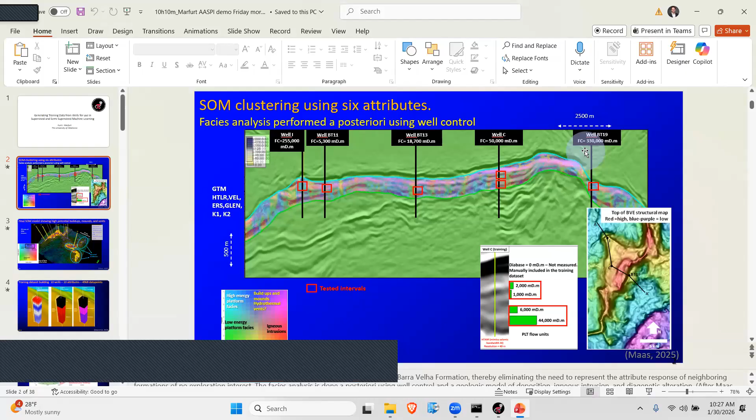David asked me to talk about the rewrite of the Linux interface, which I rewrote. So what happened? What's happened for those of you who go back and forth between Windows and Linux?

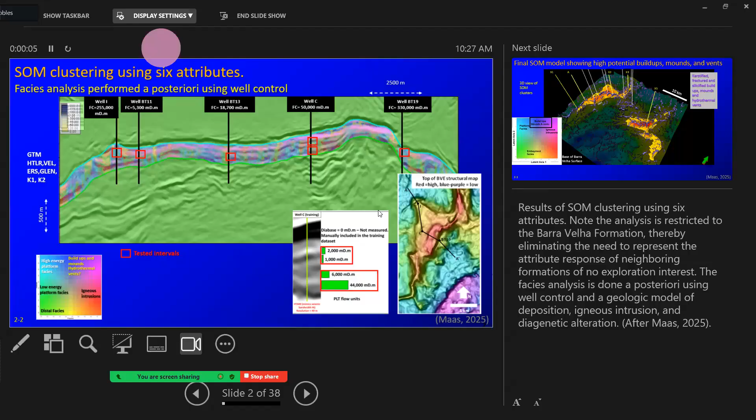You've noticed we had the old Linux environment where we started the user interface, AASPI util. And then about 1.5 years ago, David and Thang Ha rewrote the interface with the VDS in mind and more logical. So in October, November, I said, all right, I'm gonna make all of our Linux interface look as close to the Windows interface as possible.

But then, of course, being me, I said, he should have done this, he should have done that. We argued for two years about what the word machine learning should be. I like the word shallow learning. And he says, no, that's not going to market. Don't use the word shallow learning versus deep learning. He won that argument, okay?

So we call it now attribute-driven machine learning, or multi-attribute machine learning. So then I rewrote all that, and guess what? After I rewrote that, then he had to rewrite the Windows one. But today they look the same, okay?

So I'll go through what the layout is for that and for the pre-stack utilities too, where we don't have a Windows interface. But let me start with this.

This is real simple. As Nora showed the other day, I had eyeball surgery with the cataracts. You will all have that if you live as long as I have. It's not painful at all, but it's a month or two of stumbling into stuff and having glasses that you need near, and you walk into things. So I'll have difficulty here.

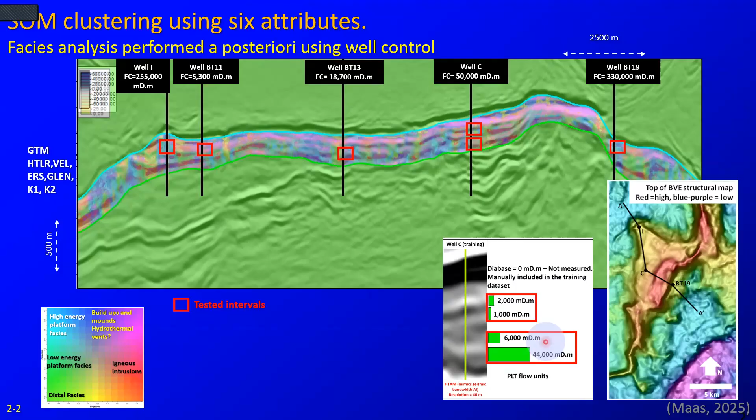So he has high permeability, low permeability. And here is his SOM model showing more geology. So it's a posteriori interpretation. So you do the clustering first. Now choose the attributes, you're prejudicing, etc.

But then with the well control, he can say the purple is karstified, and the red or the pink are igneous, and then the cyan are platform facies, etc. And in there, he's using geomorphology as well, obviously.

Okay, so you got a geologic model, and this is how unsupervised learning works in general. And then he's got appraisal candidates. Here is where all his wells are, and then they haven't done anything, so they're high grading them.

Now, if you remember from last year when he talked about this, the issue they have is they don't have many shear logs, or maybe no shear logs at all. And so they can't do the cool rock physics stuff within a timely basis. So he feels like it's 5 years till they get enough data to do a good quantitative interpretation.

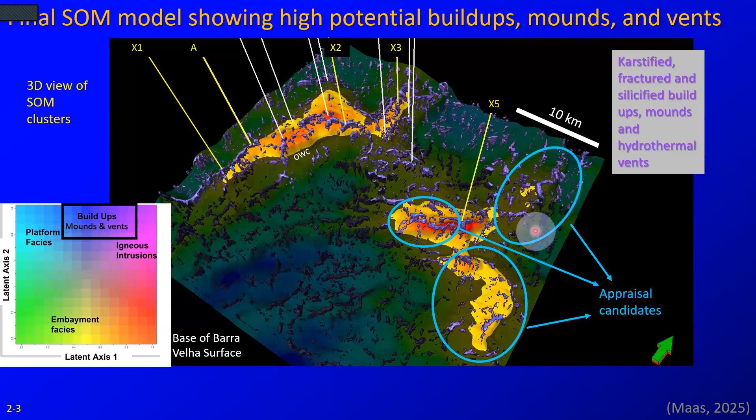So what can you do now while you got your drilling boat out there? Okay, so here is where he went then, and what initiated the work I'll show you here now. The data happened to be pre-stacked depth migrated.

They're good quality data. He took the wells, and then the hard way, using spreadsheets and whatever, he extracted voxels, a 3x3, around vertical wells, okay? And then this became training data.

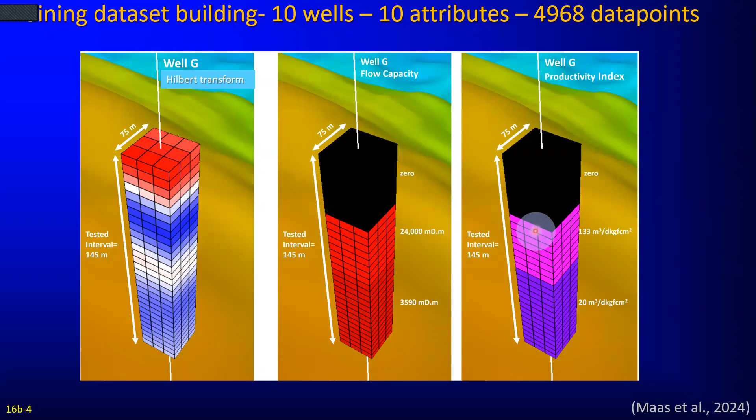So the training data were the different flow units, okay? Really good production, and then mediocre production and no production, okay? So that's the kind of facies that many of you are interested in.

And here is the kind of things the hyper producers, this area, this is what they want to drill first. And then these are good producers, and the geology, from those of you who may have read his papers, they're published papers. Heather has most of them posted on our website. Definitely it's in his dissertation.

It's a lot of hydrothermally altered dolomite. Okay, so hot fluids coming in, karstifying. So it's a pretty cool paper.

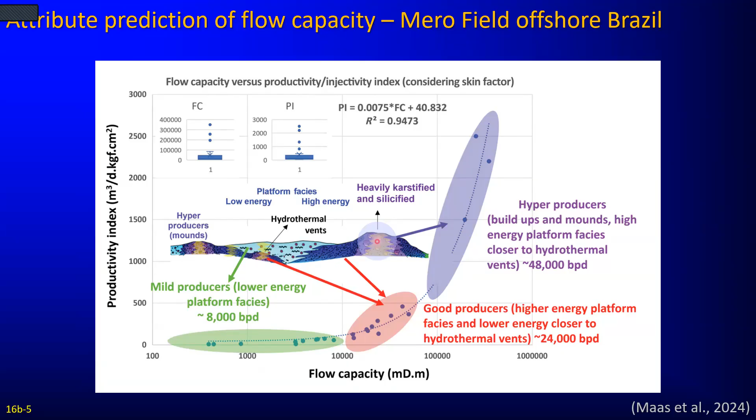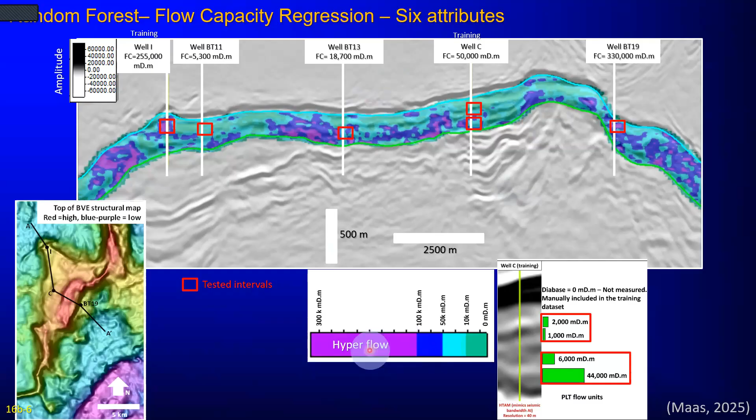So what they want to do is find out the areas with the high flow capacity. And then in this case, he uses a random forest decision tree, the software that David has packaged up, and that training data from the wells to show where is the hyperflow, which are these kind of purple features, okay? So that's kind of where we want to go.

We want everything to be like Marcus did, but not have the patience and the time that Marcus was able to spend doing it, okay? So I thought...

Okay, if you read the newspapers, machine learning is going to get rid of everybody's job. If you look at our software, it's oh my God, where do you even start? It is really complicated. And you've seen little steps yesterday.

The one who went all the way through was Hilmi. Okay, there's Hilmi. Notice I can't see people, all right? So there's Hilmi back there. I think he did a great job of showing the flow. So what I put together is a flow chart, okay?

And this will be in all of our documentation in the not too distant future. So here is where we have started, let's say as of... oh, we've been doing this for 3 years or so, but the software you've used up till now. You start out with a seismic or attribute volume, okay, whatever you like.

And then you define polygons, like, oh, I think this is a mass transport complex. I'm thinking of GA here now. I think this is a mass transport complex, and I think this is salt, diapir, and I think these are conformal sediments, and I think this is maybe a channel.

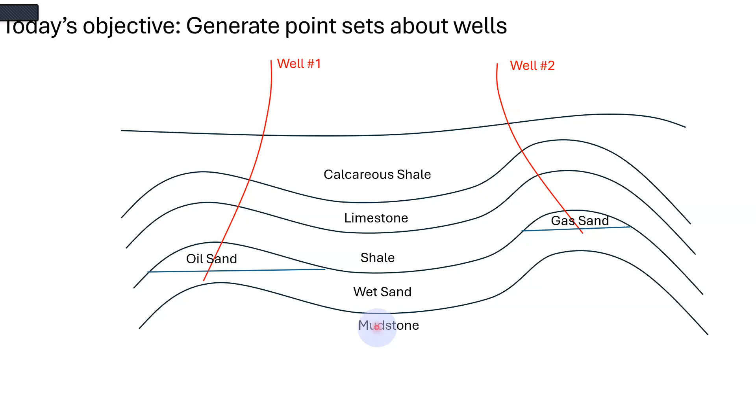So the cases we've done up to date, the wells were vertical. Tao Zhao did one of these down in Tampico, in the Sierra Madre Oriental. Okay, shale, clay, carbonate wash. And then Marcus did one. Here's Marcus's on the left.

And here's basically what this algorithm does. It takes the well logs with measured depth, X, Y, Z, and then we need a facies log. So I've been talking to Georgia and he said, no, all you need is this. So I trust her. I'm going to use the LAS log with facies, where you have measured depth, relative X, Y. I hate that because I have to then have the real X, Y's, another step. And then within that facies, I need the top and the bottom of the facies.

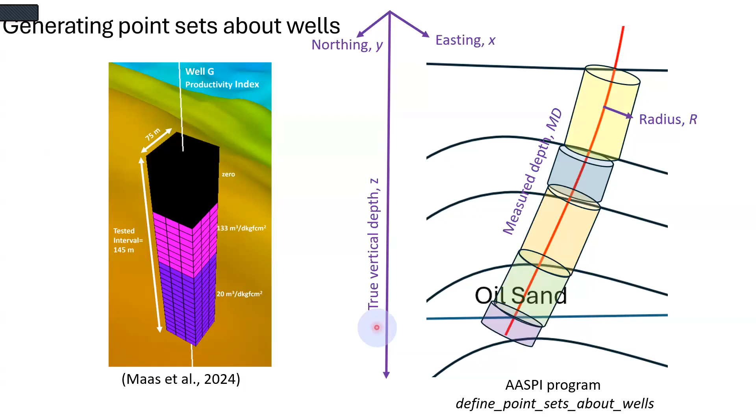You have the dip of the well, and you have the structural dip. So you're going to generate a cylinder that's oriented along that, and that's your points. Okay, so the concept's pretty simple when you draw a picture like this, all right? And so now here's how you're going to generate point sets about the wells. I'm going to go through it and then we'll just do it. It won't take long to do.

So step 0, this is the part that we're not going to help you do. You're going to have time horizons. And if you're in a resource play, you're going to have hundreds, if not thousands, of wells. And if you're in a developed field, you'll have maybe 15, 20 wells. And whatever you have, the engineers want everything in depth. So you're going to convert those horizons to depth, okay?

And the common way to do it with Petrel, for instance, is with geostatistics. So you take your carefully picked horizons, and then you're going to take your time-depth pairs for each horizon. That means you have to tie your wells, you know how to do that. And then you're going to do kriging with external drift. That's the formal name, and Petrel might give it a different name.

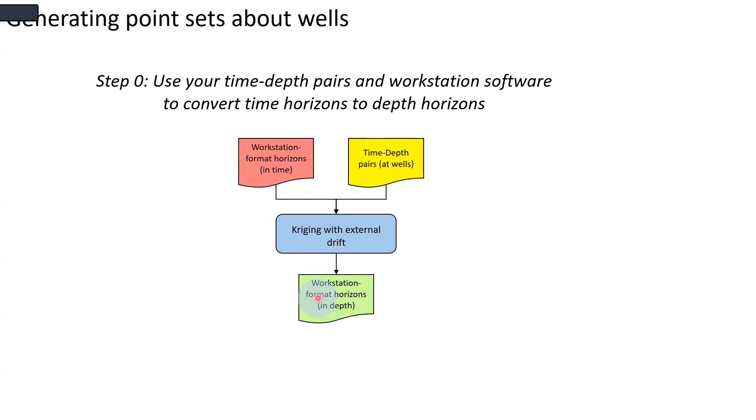Okay, so here's your workstation: horizons in time, your time-depth pairs, kriging with external drift, workstation format, horizons in depth. So I know all the guys in Devon, they do that. They have to do this. This is your product, okay?

Step 1 in our software: these horizons can be in all sorts of different formats, 4 or 5 of them. So you've got to convert your workstation format horizons in time. They're text files, and we need to convert them into AASPI format horizons. We'll do the same for the depth one. Otherwise our codes have to read this option, that option, the other option, and things get out of control quick.

Also, we can display them. Then we need to convert our time domain seismic data to depth. So here's our horizons in time, here's our horizons in depth, our seismic data in time, and we're just going to register the data.

If you have 4 or 5 horizons, you're just going to vertically stretch and squeeze these things to fall in between. It's a real simple concept, but built on the work you do day in and day out, picking half a dozen horizons around your target. It's not going to refocus the data, but it's going to use all that well control you used to generate your depth horizon.

Then step 3, we've got to compute structural dip. We're going to use that depth volume now, push the buttons in AASPI, generate volumetric dip in the depth domain. That's going to give us the guide for these little cylinders.

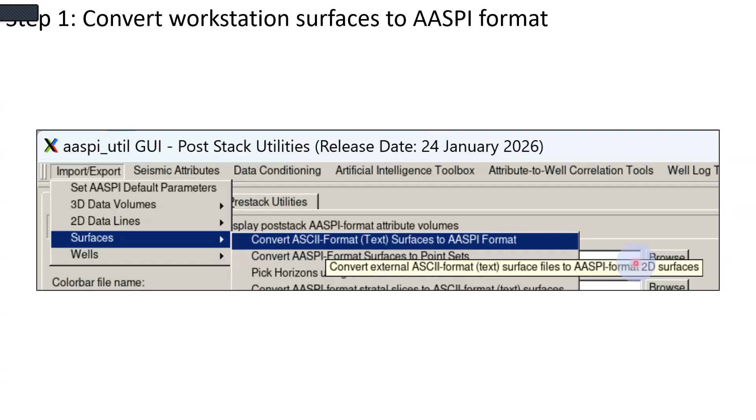Okay, so you're going to pick that up, and in this GUI you're going to have a couple of things. Yeah, I know we did this yesterday because we had this unknown. We're going to pick in the D_MIG Volve—oh, we're in the Volve data set, day 2, Marfurt something. There's a time and a depth. So the time volume is called Volve, and you're going to bring that into the first one.

The default here is EarthVision, we'll skip that for the moment. The input time is going to read it in as seconds because that's what's in the headers, the .h file, and you're not going to be able to change it. That's what it is. But our time data you can change now. Our horizons are going to be in milliseconds.

And our output, we want them to be in seconds. So most everybody will have their seismic data volume in either seconds, kilometers, or kilofeet. That is 98%. Yeah, there's some research guys, now in India, who might have put them in meters or feet. But those don't display well in most workstations. Most of the ones I saw were either milliseconds or feet or meters.

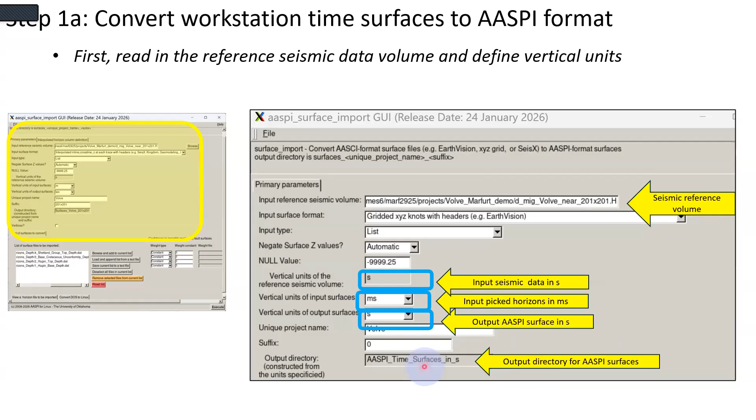Okay, anyhow. The vertical units of the output is going to be in seconds. It's going to generate an output directory called AASPI time surfaces in seconds. Okay, click OK, we'll go through it.

Oh, we don't click OK yet. We've got to worry about the horizons. We're going to go here and click browse and add to the current list. And I guess I should do that.

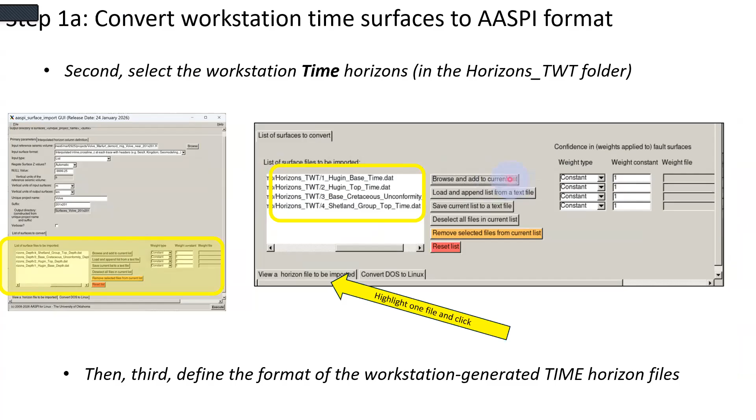So David, if I hit escape, if I minimize this—yeah, here. Okay, so am I in Import, Export? Let me just look at it. Am I in the right spot? No, you're good, yeah. Go up. Go all the way, okay, down. Great, okay, I'm in Import, Export.

I'm going to go to surfaces, and it'll be the top line, ASCII format. Going to browse, bring in my day 2... number 2. I'm in the wrong spot. Day 2—you're in the right spot. This is time depth. Oh, time to depth, thank you.

Okay, so it's got that. And then it's saying, hey, you've got to define your vertical units. It's going to be by default undefined, because you don't know what it is. So I want them to be in seconds. I'm just going to put anything in here, January 30th, whatever.

And then down here, I'm going to browse and add to current list. I'm in this time depth conversion thing, and they're going to be called horizons_TWT. There's four of them, numbered from deepest to shallowest, but let's just go pick them. Okay, so there they are.

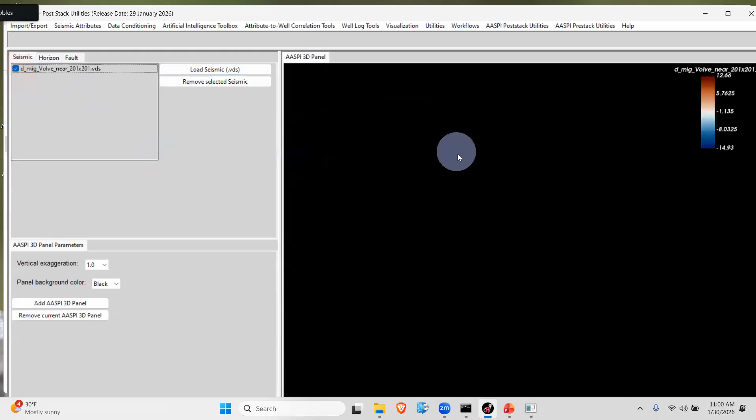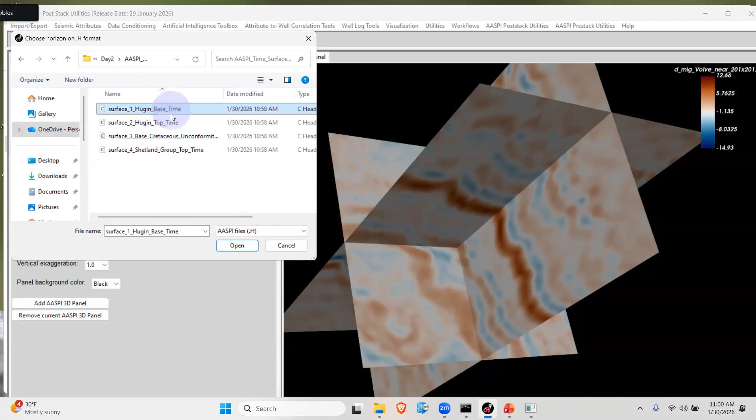And here's my data. Got it upside down. Then I'm gonna have horizons. Gonna load horizons. They're going to be time surfaces in seconds. I got 4 of them. Gonna choose them all. Open. Then I'm gonna display them.

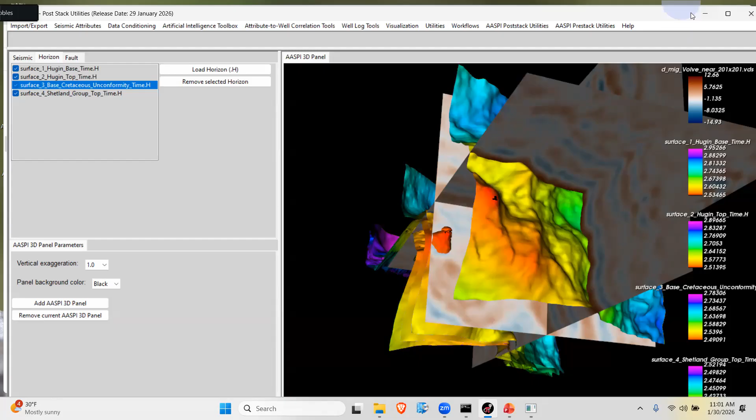Okay, so here we got the surfaces in there, okay? So if you don't like the surface, they were picked by somebody at Statoil. Okay, so you might get something like that, okay? Now, I think they're probably ended up like that because I didn't restart it.

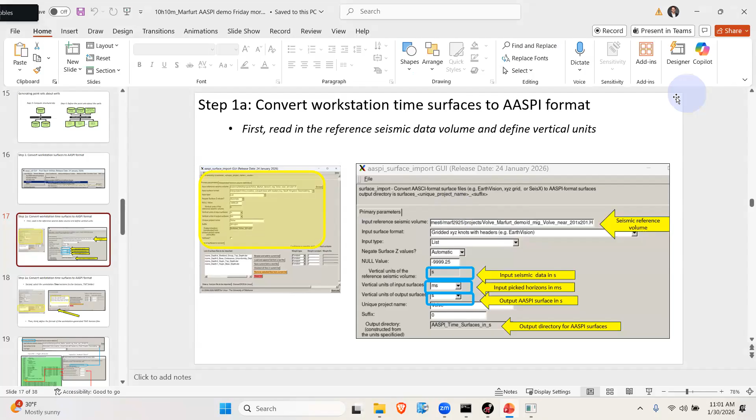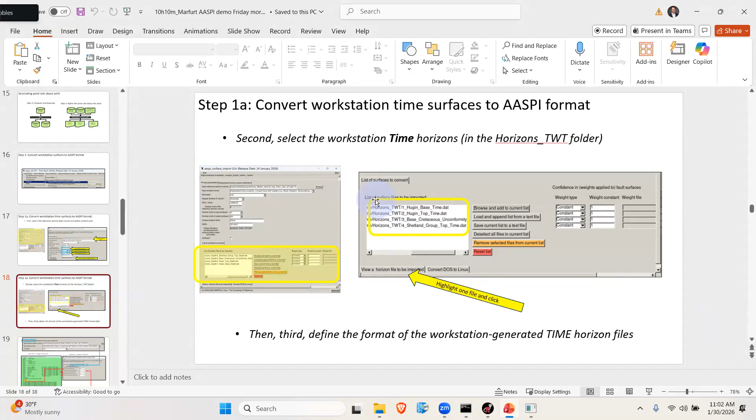And then I highlighted this thing. I picked my 4 horizons. And then I had to worry about the format. So I had to skip the first 58 lines and I went to 5, 1, 2, 5. And it has to be the Kingdom Suite, geomodeling, this is maybe Charisma, one of those.

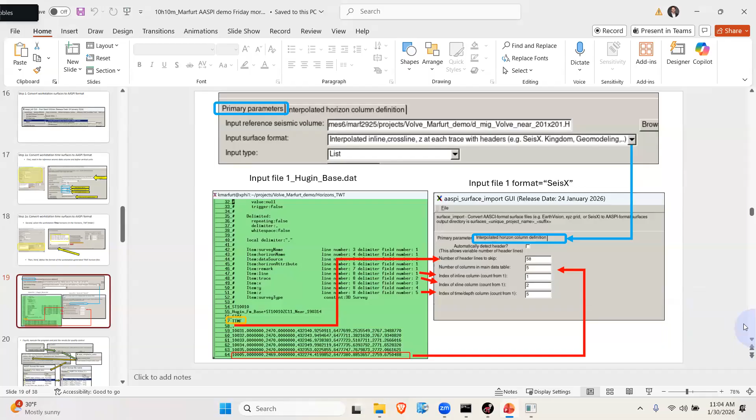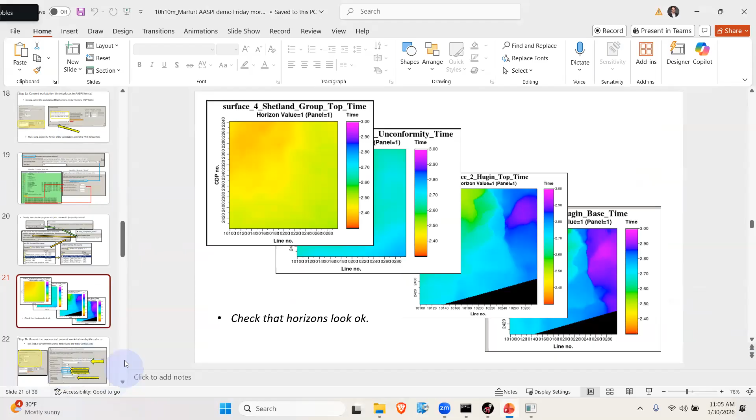And there's really only one difference in depth. We're gonna use the same thing, and then I say, yeah, it's a good idea to quality control your surfaces. So many of you did that already. Okay, then we're going to repeat the process for depth. We're going to use the same seismic volume. And now the difference...

When we bring in our data, are we seeing it? Yeah, we're seeing it. Good.

Our reference seismic data is in seconds because that's what we got. We got pre-stacked time migrated data. Then our input geostat horizons are in meters from Charisma, whatever. And then what we want to output them is in kilometers. So you see, we got three different units here now. Okay, so we're going to do that.

So we're going to put in meters, kilometers, and the input data we can't change. So what it's reading from the input data are the X, Y, inline, crossline. That's what it's reading, the size of the survey. If your horizon is much bigger than this piece of the survey, which it is here, it's going to crop it to be just overlapping the survey.

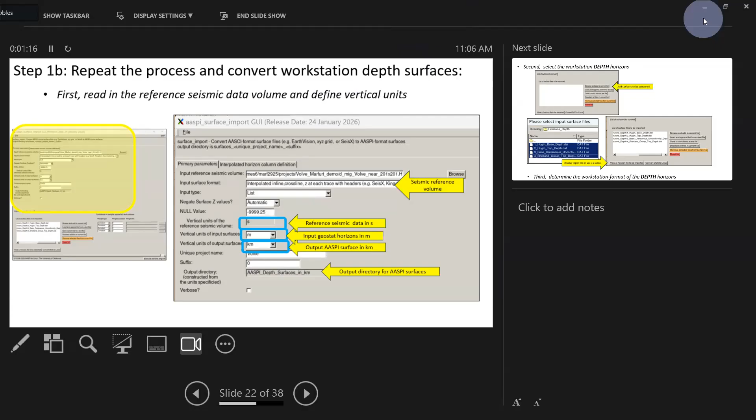Okay. Yeah. Okay. Okay. George, can you help them? We're trying to follow. Okay. So in this, okay, I will then go back here.

I'll minimize this. Okay, I am in surface input. I am going to surface import. I've got the same reference horizon, which is D, MIG, Volve. 101 by 1, or 201 by 201.

Then I've got a Z-null in mapping. Z-null means it's not a point. So a common one is minus 9999.25. That's just a common one, okay? From the people who wrote all, the same people wrote all the mapping software.

Yeah, the ZMap people wrote it all. Yes, they wrote it for everybody. Quit, started another company, rewrote it.

Okay, so the input units of the surface now are going to be in meters because they're the depth data. The output surface I want to be in kilometers. And then I need my output directory to have a similar name, but it's going to be AASPI surfaces, depth surfaces in kilometers. That way you can keep it straight in your head.

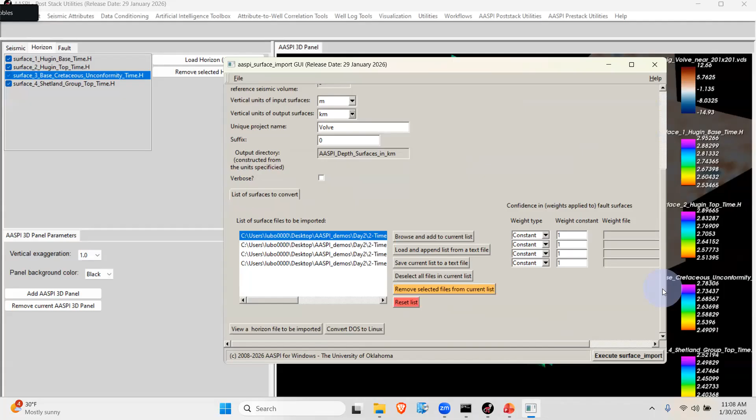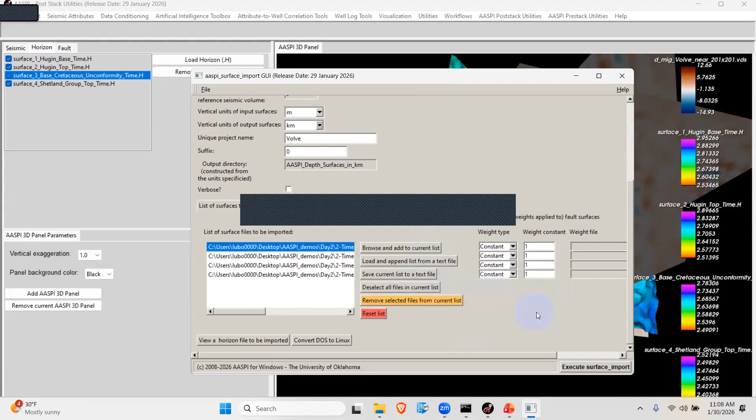All right, now I've got to bring in, I can go back, I can reset the list of horizons. I'm going to go into a directory called up, got to go up, and they're going to be called horizons_depth. And those are the ones, again, that came from Statoil.

Okay, but they were converted to depth using geostatistics or whatever. And I've made the name simple so it's easy to understand which one's high and low, because you guys don't work the North Sea, or most of you don't. So the base is below the top. The base is at the bottom, so I'm numbering like a geologist where we started ancient time and whatnot.

Gotcha, all right. But you know that you might have different styles in different companies. Yeah, okay? Yeah, just like, hey, red is good for low value, shallow, and then velocity analysis, red is hot for high value. Yeah, so, you know. Okay, so I got those.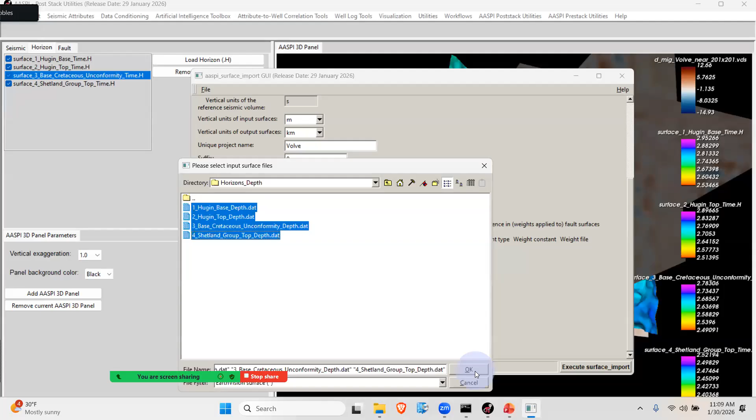Now the format is going to be the SeisX format. Going to be very, very similar, okay? But I need to change it just one thing. For whatever reason, the header data has 59 header locations, okay?

And how do you do that? Well, you look at the simplest thing. I use VI and Linux because I'm a Linux person. But you just bring up your happy editor and you put the number of lines, and you say, okay, that's it. I mean, that's the foolproof way.

Does the automatically detect header not work? Where's David? Try it. No, I tried it and it did not work. No, okay. I didn't write that. I'm just wondering what. Me neither. I didn't write. I was fine. So yeah, I'm scared of it. Okay, I don't know what it's looking for. It's very complicated. No, all right.

So then, that should be good. I'm gonna just execute. Hopefully it works. I'm gonna multiply by 0.001 again. And it says it worked.

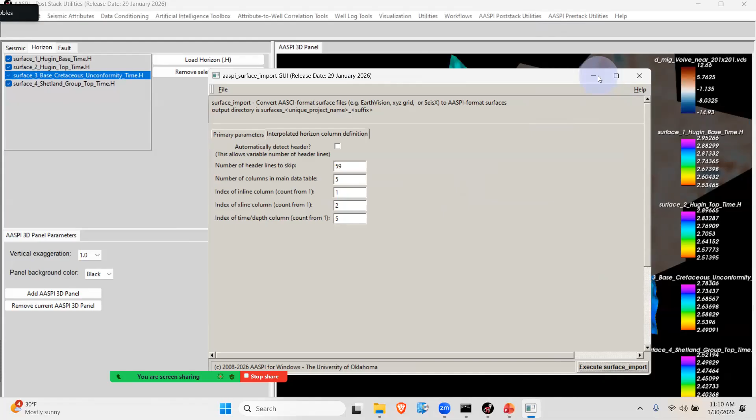Okay, one thing, with the 3D, if you want to find the surfaces in depth, it's not gonna match. They're gonna plot, but it's not gonna match. It's because in the 3D, there is no coordinate system. I mentioned that, then I was gonna skip that part. It's okay, just, it's because they are loading the horizon, so just caution. So the XY is XYZ, but we don't have a coordinate system. So everything is like in number of inline, number of crossline, number of time samples. So definitely the time and the number of samples, because the sampling interval is different, doesn't make match. So I'm gonna put some more control there.

No, it's probably a two-line fix. Here's the issue: we don't have any depth data, so we don't have a depth reference. And we don't know how high, how deep, how shallow to make it until we've brought in all the horizons in depth, which we haven't done yet. So you gotta, it's not a difficult thing.

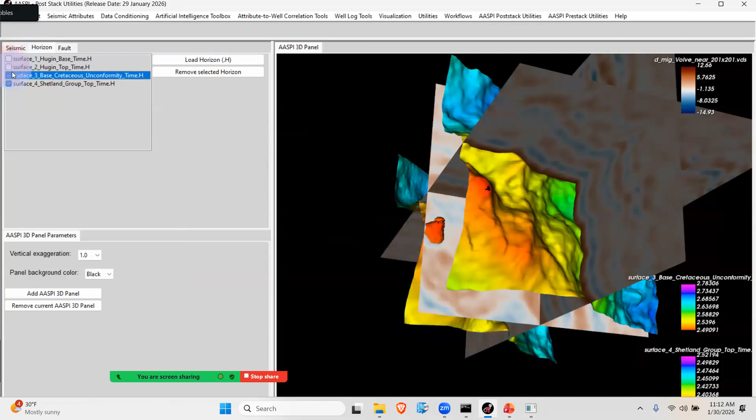No, it's not difficult. One thing I'm gonna put as a toggle is time and depth, like a lot of interpretation packages have. Okay, now David, are you saying I cannot? You can plot it, but it's not gonna match the position. No, it's not. So I'm just gonna take off the seismic as well.

I'm just gonna load those 4 horizons so you can see that they did get loaded. Go to Horizon, load horizons. It's going to be under this directory called AASPI depth surfaces in kilometers. I'm trying to be real explicit as to what they are. I'm gonna pick all 4 of them. It doesn't matter the order right now. Open it, and then I have to put a check mark in front.

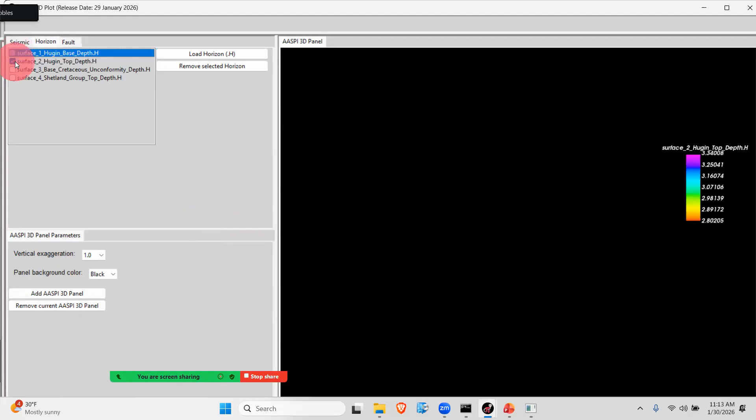And there they are, okay? So those are the depth horizons. They're just horizons, okay? So hopefully we got there. Is everybody kind of there? Yeah, all right. Okay, now the next thing we're going to convert to...

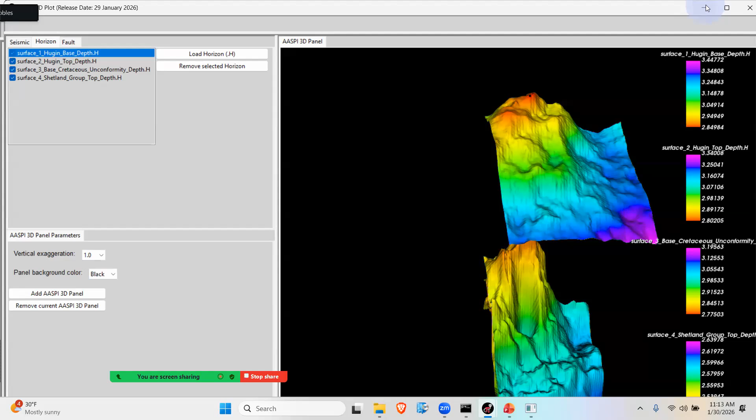We're going to take our depth horizons and our time volume and convert it to depth. So we're going to go under data conditioning on the main menu, and drop down to convert from time to depth. Now, the same program we call from 3 or 4 places, in the pre-stack data we do this AVAZ and stuff like that, but here it's the same program, okay? So you convert from time to depth. Everybody kind of sort of there?

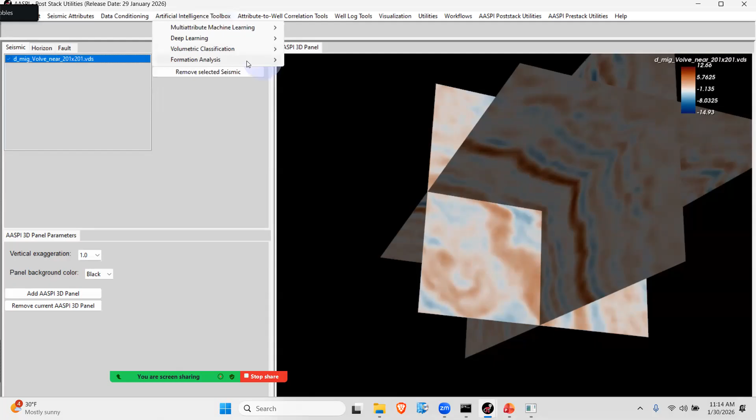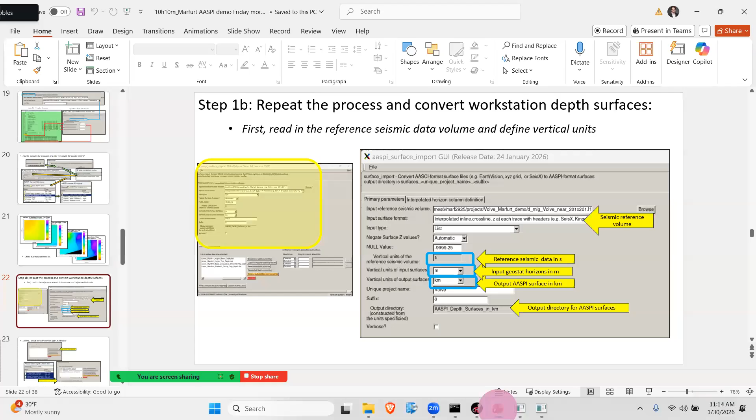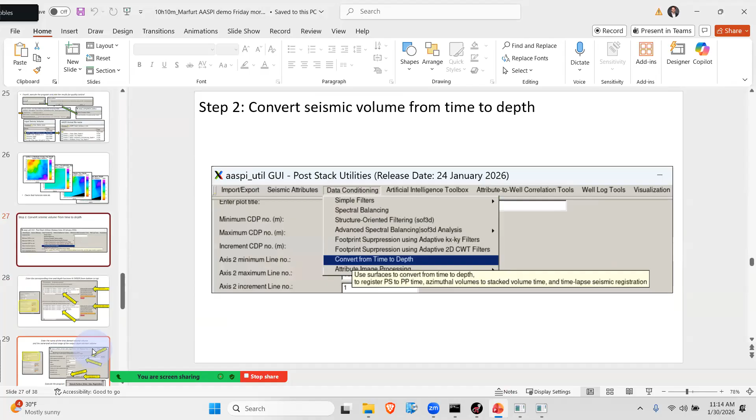Okay, so here is the surface-driven registration GUI, and let me just go over it a bit in the PowerPoint. It's kilometers, right? The output? Yeah, the output's in kilometers.

And the first thing we're gonna do is bring in time and depth horizons. So if you drop down on this GUI, here's where I am on the GUI. Hopefully that GUI came up for you. All right.

Is the GUI showing, Corey? I kind of got behind on everything. But I can't try that. Okay, we're gonna help. It came up. It's under data conditioning. Yeah, okay, all right.

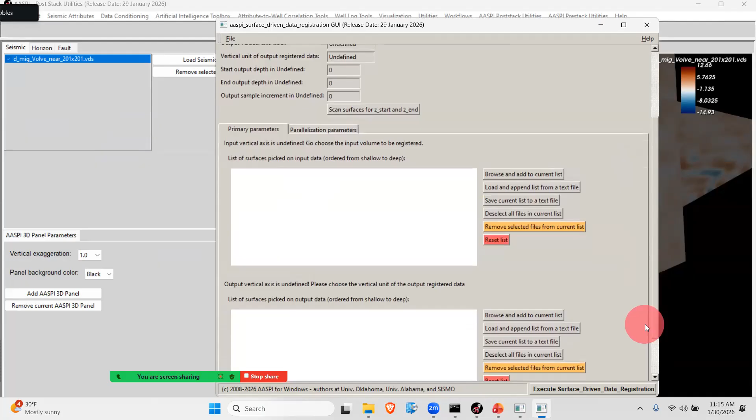So now let's go to the hard part first. In the top it says here... let me go up here. I'm going to bring in my data set, D MIG Volve, and it's under time to depth conversions and ML. Okay, so that's where it is. Give it any suffix you want. So that's my time volume.

I've got to enter my... I'm wondering why it's doing this wrong. Hang on, I don't know why that's... okay, let's go. Oh, here it is. Here it says the input vertical axis is in seconds, so I go to time surfaces in seconds. Now this is where it gets a little tricky.

I'm going to click this guy on the right, it puts a name, and I'm going to sort them so that number 1 is on the bottom and number 4 is on the top. Because these guys have to have the same number of horizons and in the same order, since they map 1 to 1. Can you order them with the minimum of each horizon, the maximum of each horizon? You can do it automatically.

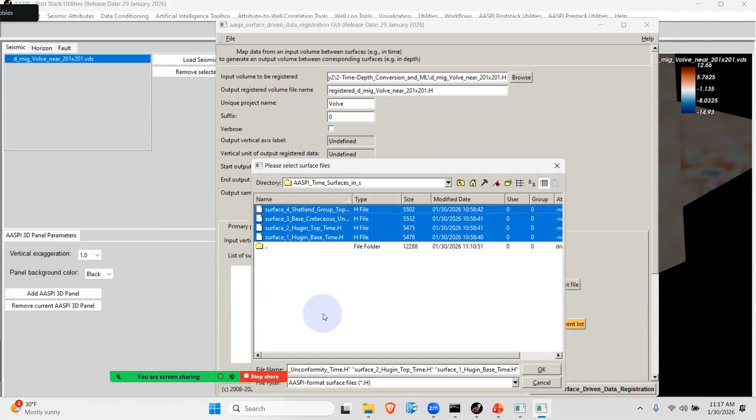From the .h, if you know the mean of each horizon, we'll think about sorting that. Today, what I did, I put the numbers 1, 2, 3, and 4 in front. So we've got those, and they're in order from 1 on the bottom to 4 on the top. I'm going to pick them all. If you don't have them in order, you have to pick them in order, one at a time. Okay, so there we are. That's in time. Then I want to do the same thing in depth.

This is going to be AASPI depth surfaces in kilometers. I'm going to change the order so 1 is on the bottom. I get that. Now, here, my output vertical axis is going to be in depth, and it's going to be in kilometers.

Now the start time in depth, well, what is it? It has those 4 horizons. I'm going to scan them. The 4 horizons range from about 2.5 to about 3.5. I'm going to make it a little bit above and a little below. I'm going to put in 2.5 - it's not a point, 2.5, 3.5. Okay, I'm good, so I got that.

If I just hit execute, it's going to hate it because the default increment is 0. So we're going to pick something reasonable, like 5 meters. If you're Corey, he migrates at 5 meter increment, right? In Brazil that's real common. 10 meters is common, or 30 - it depends on how much money you have. Okay, so we're going to put in here - it doesn't really matter, it has to be a reasonable number - I'm going to put in 005, which is 5 meters, so 0.005 kilometers.

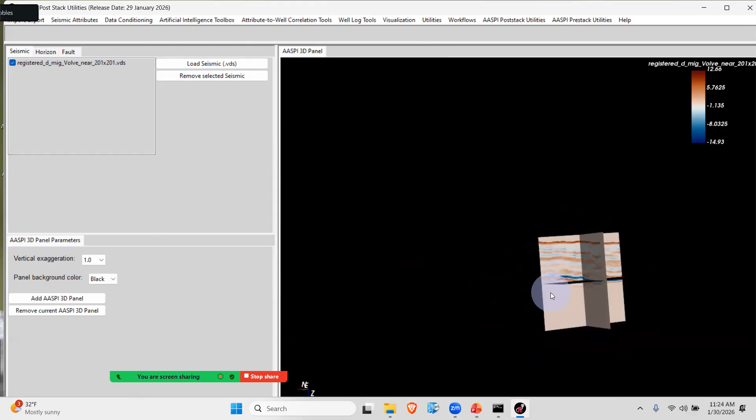And there's the data converted to depth. Now, you'll notice there's some blank spaces - that's because the horizons didn't go that deep. And then if I look at other parts, it's clipped - oh no, the input data were clipped, that's what happened. I'm using the triangles to match corresponding line surfaces in depth. Yep, and that's why you build your time-depth earlier.

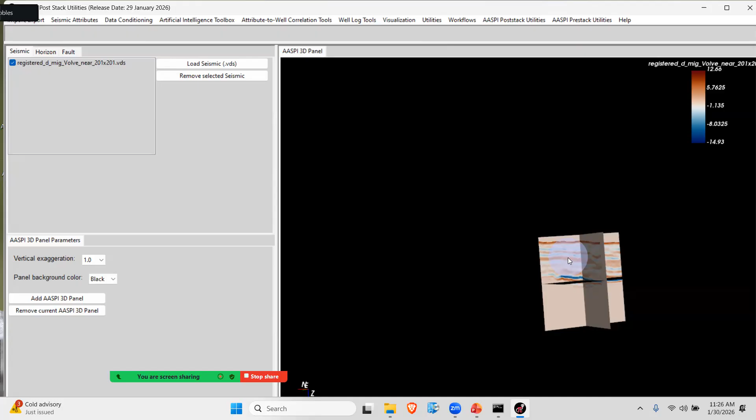No, let me explain real quick, it's something quick to fix. So what happened is, I know you want to show your seismic in depth, so remember you have a time window and a depth window, okay? So what happened is — you can't put an axis on yet, no, okay, that's all right, it's a good feature to have.

So you see the surface in depth. One thing we have in this — oh no, don't open us. You don't want to show them how to edit it by hand, do you? Yeah, let's do that really quick. Okay, just demo it.

So if you don't want to follow, that's okay, but the thing here is I go to the surfaces in depth, okay? I go to the dot H file, and I'm gonna edit the dot H. So, bottom.

Hold on — so you see here, this little seismic init is the initial time. It's using the seismic in time, not in depth. For some reason it doesn't match.

So we just found out yesterday. We just need to rewrite it with the correct values. The correct ones are actually 2.5 and 0.005.

That's it. And then if you do that for all the surfaces — let me show you one. You go to surface 1.

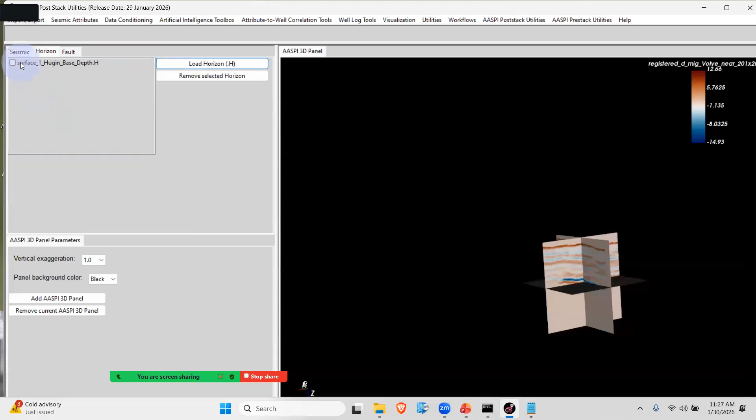And that's it, you see? It's because it needs to know the correct initial time of the seismic and the sampling interval. It's using the seismic in time, not the seismic in depth, but we'll figure it out — it should be an easy fix.

I mean, this is group programming — you have different people from six different countries documenting things six different ways, and then merging it all together. And this is what happens.

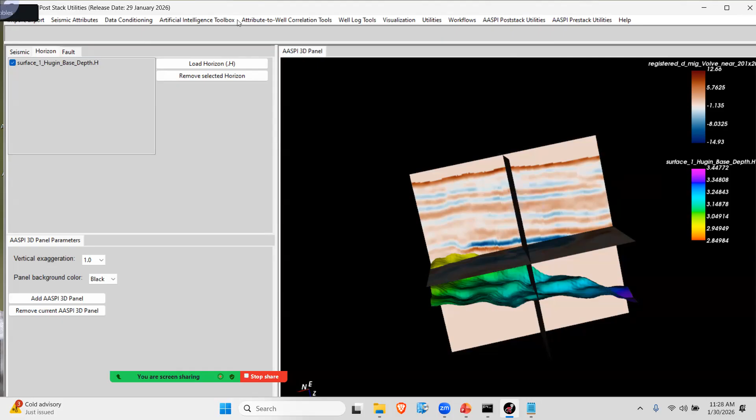Okay, I'm just going to show the last picture. So the last picture is simple: we're going to accept that you've got to go through artificial intelligence, multi-attribute machine learning.

You could pick unsupervised or supervised, doesn't matter. Generate training data — here we talked about polygons earlier, okay, and extract point sets from the polygons.

Surfaces — David showed that yesterday for faults, made point sets. We are going to go here, well control option, define point sets around the well, okay?

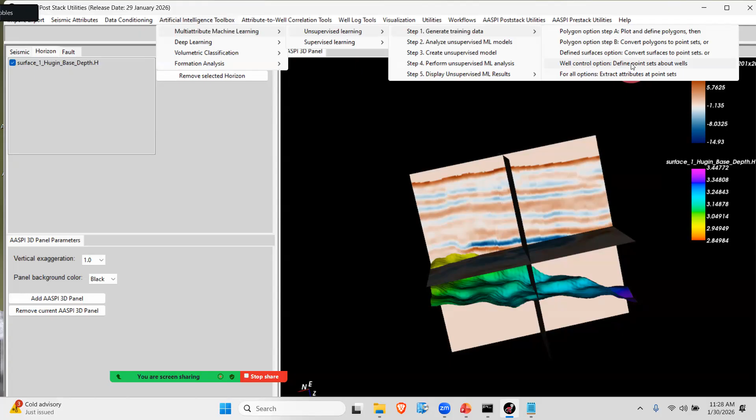And then Anik will put his point sets from SAM, okay? So there's the program — we've got a couple of wells.

We've got two wells, and it's called — I've got to go to day two, here, this one. It's going to be well data, and there's two wells, F12 and F15B.

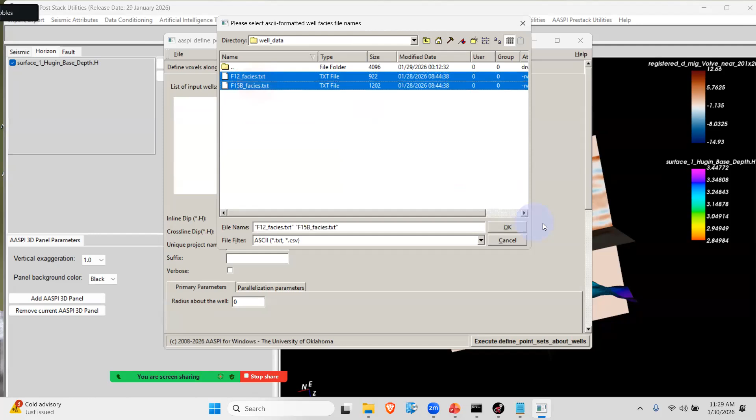Okay, I can show you what's in those files, but let's not for the moment. I've got a — oh, crap, forgot one other thing.

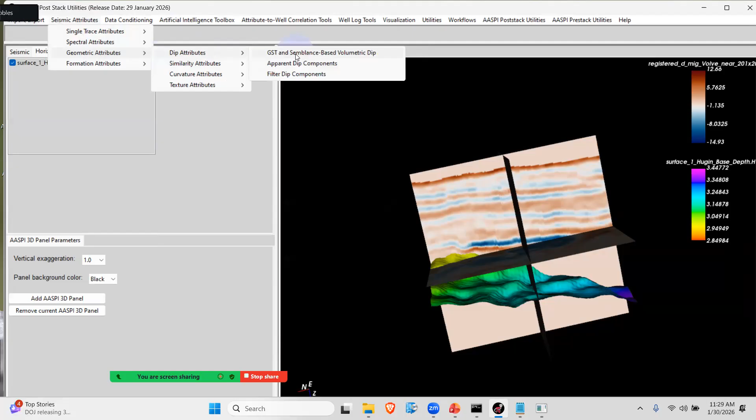Seismic attributes, geometric attributes, dip attributes — GST and semblance dip. Take our depth data, the registered data.

Use all the defaults, hit click, okay? So it's going to take that depth migrated data, and it's going to now have dip and depth, okay?

Put cancel — why do you have this window? Just put cancel if you see that. Oh okay, yeah, it thinks I'm hacking into my own computer, because it's running MPI. You do that once — you only have to do it once, and not just once per day, once like ever.

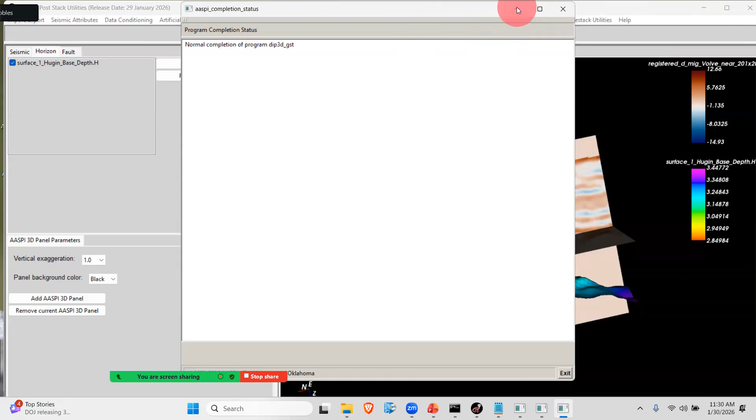Okay, all right, so there's the depth data, inline, crossline, dip. So now I go back to this program. I can minimize that.

And define point sets. Down here, pick the inline dip, crossline dip. Don't worry about parallelization. I'll just leave a default radius of 125 meters. We'll have to figure out what good defaults are.

And then we're gonna execute it. Except I gotta move it up. Execute it, and it runs really fast. Okay, now most of the facies information is outside of the crop volume that you are getting, so it's going to show nothing found, nothing found, nothing found.

But what you do is go to the directory where the data are, and so it's probably in this one, David? Nope, no, we see the day two. Day two, and it's here. So just date modified. Go up, oh it should be around. What are you looking for? What is the name? It'll be the name of the facies with the files.

Registered data, oh, here we are. So in my case they're called like facies claystone, facies claystone to shale, facies sandstone wet sandstone, facies silty sandstone, facies unconsolidated quaternary stuff. And in your case, facies 1 carload, facies 2 carloads. That's what we just created.

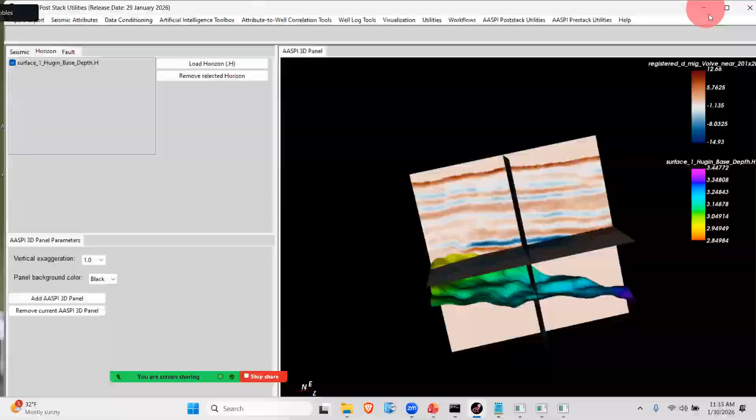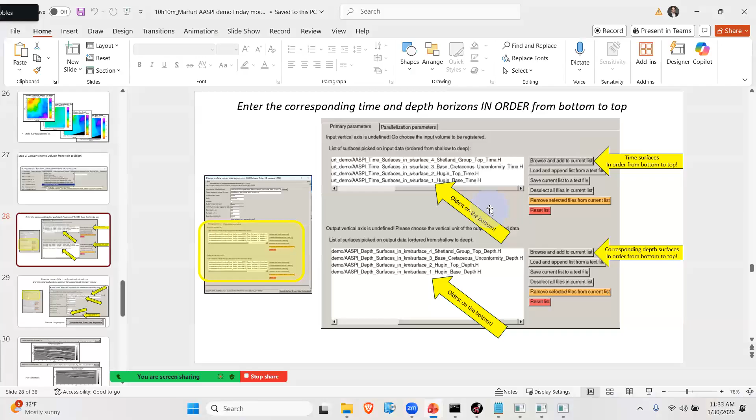Okay, so the next steps then. The simplest, we need to determine the simplest way to convert alternative facies logs into something this program can use. I use Excel a lot. Yeah, but Georgini says, yeah, the LAS files and open, that's a real common one. LAS is that. I mean, and where you have measured depth, relative XY, relative.

True vertical depth, and then the facies name, I can figure that out. You usually have the option of having all of the coordinates or an LAS file paired with them. Yeah, but that's probably more. So there's two files, that's the problem, there's at least two files.

Yeah, but okay, so then you might actually look and see if there's any LAS readers in Python already. Oh, we can read LAS, yeah.

So the other thing I need from Georgiades again, and then maybe from Stephanie, if she's still here. I need now for perforations the stage number for each well. And I think the simplest way to do it is to have, what's the measurement you want from your well? Is it breakdown pressure? Is it carloads of sand? So then if I have the XYZs and it says, okay, it's this bin of carloads of sand, that's my facies and I can read that in.